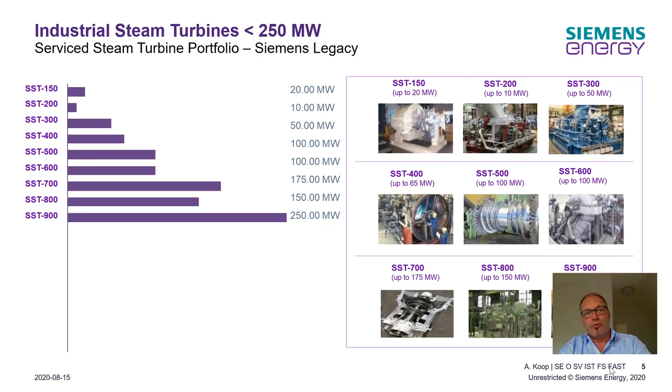Broken down to the industrial steam turbine service, you find here our portfolio, different types from 10 megawatts up to roughly 250 megawatts. The equivalent of it you will also find in our generator portfolio, and here also listed the large generators for the utility power plants.

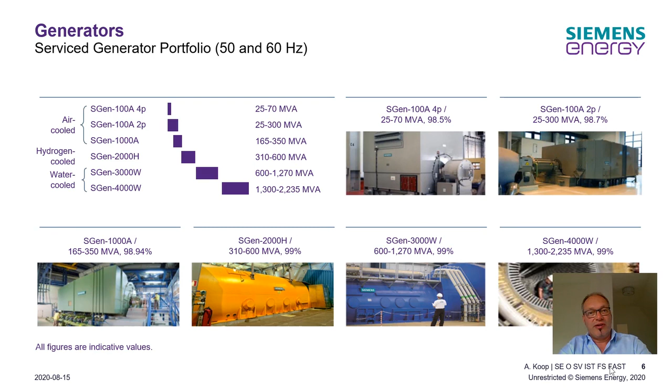Our service portfolio is about digital services, performance enhancements, long-term partnerships, maintenance solutions, and last but not least, training and consulting. That's it with a very brief overview of Siemens Energy.

Now I would like to start this section here, the reliability improvement, with a short video to give you the first impression about our remote diagnostic service which we offer and which we are talking about later on.

We at Siemens understand that reliable operations are key to a profitable and sustainable business. Remote diagnostic services allow us to support our customers 24 hours a day in a 7-day week, increasing their availability and reliability. The remote diagnostic service is an integral part of the Siemens high-value long-term programs. In 79 countries, we monitor the complete range of oil and gas and industrial rotating equipment.

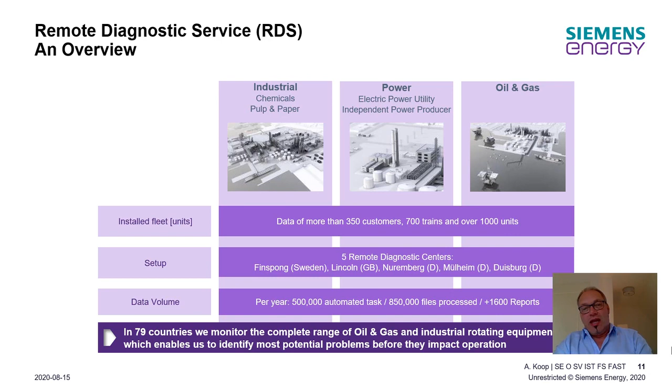You can see just an overview about our remote diagnostic centers, the tasks they do, where they are located worldwide, and which sort of industries we serve.

The RDS tackles mainly the questions of reliability and availability, and tries to increase and improve both of them with different tools, different processes. Both together enable us to improve your operation and your whole plant management in the before mentioned reliability and availability aspects.

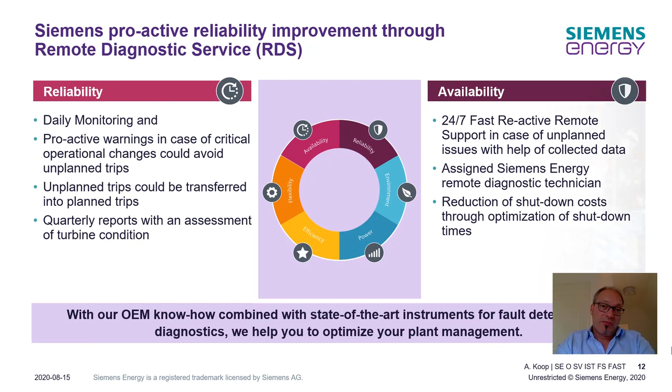This is especially the higher availability through fast problem analysis, the higher reliability through the predictive analytics, the turbine-specific outage planning, because we know very well about the behavior of that turbine and the areas to address during an overhaul, and of course some operational recommendations in case we found some deviations.

I will give you an example. We have at the left side of the slide the customer's control room with a process value well above the alarm and warning level. And at the right side you will see our remote diagnostic center with our virtual colleague John.

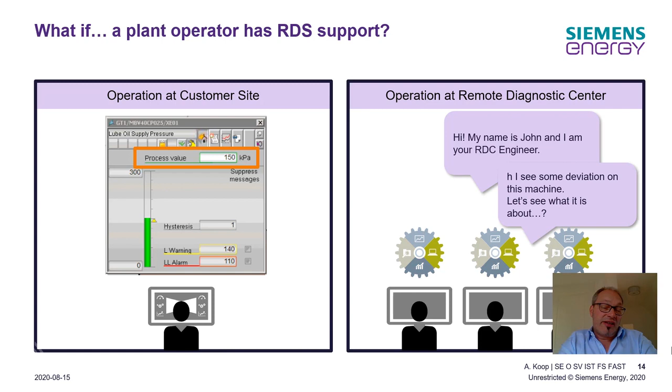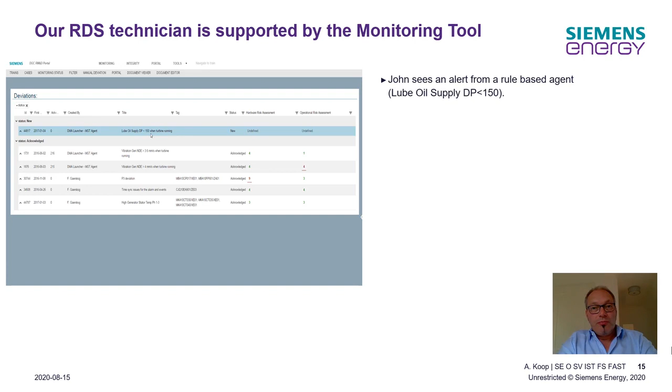He realized some deviations with the predictive analytics well before the operational side, the customer side, is able to realize that. The deviation is listed in a monitoring tool, and that gives an alarm to John.

And this alarm is of course not the customer's alarm. It's an alarm brought with a stricter level of these operational deviations, which is triggered here. Of course, first he has to check if it is a true deviation. In this case, we expect it as a true deviation, and John has identified it in this way.

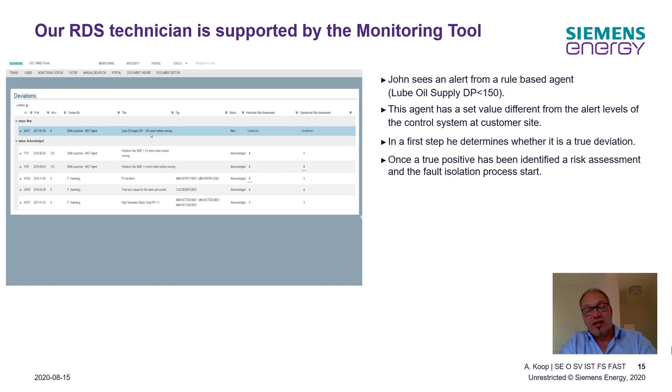He will start a risk assessment and the fault isolation process. Risk assessment is about the impact and probability, on the operational side as well as environmental issues. All of this is taken into account. When he did it, and if that's a severe risk, he will directly start the isolation process of the fault and try to get to a proper diagnosis.

And with help of the system, with cases from the past, that shows the probability of the diagnosis made by John. In case of any doubts, and in case he needs additional support, John always contacts the back office specialists and the help desk team. And when the fault isolation process is done, the recommendations can be given via notification to the customer directly afterwards and in a very short time interval.

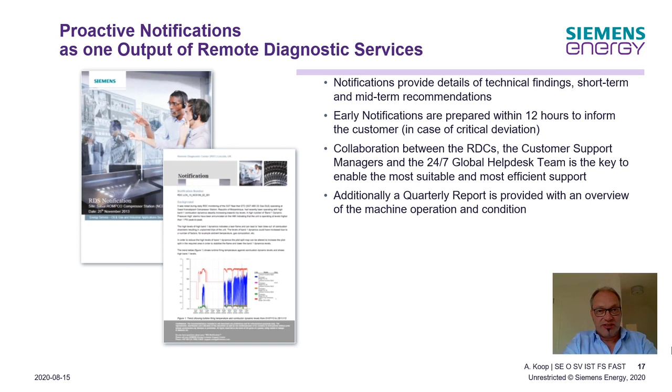I would like to give you 2 examples about this fault isolation process and the deviations recognized by the predictive analytics. The first one is an industrial power plant with heavy fouling, heavy deposits in the blade area. The so-called inlet section of steam path index showed that deviation because it increased. This behavior was recognized and led to the conclusion of the fouling.

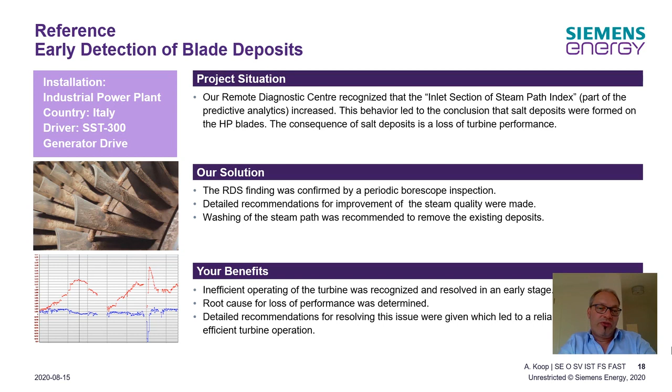In this case, a cross-check was done with a periodic borescope inspection, which also revealed the inlet section of steam path index was totally right. The blades were full of heavy deposits. A recommendation was provided for a washing process and to improve the steam quality to avoid that in future. The benefits for the customer are quite clear. The inefficient operating condition was detected at an early stage, and the root cause with the subsequent recommendations were given.

The second example was the early detection of a condenser fouling at a pulp and paper industry. In this case, a different index, the so-called stage pressure index, LP, showed that deviation. The conclusion was that there's a problem in the condenser, fouling in the condenser, especially in the condenser tubes. The customer was consulted and they confirmed that they have problems with cleaning balls.

Together with the customer, we redesigned the condenser to avoid the dead spots where the cleaning balls get accumulated. And after the cleaning balls went into operation, a successful operation again, the stage pressure index showed the low values like before. Again, an inefficient operating condition could be detected at an early stage, and together with the customer, we were able to solve the problems and to give proper recommendations.

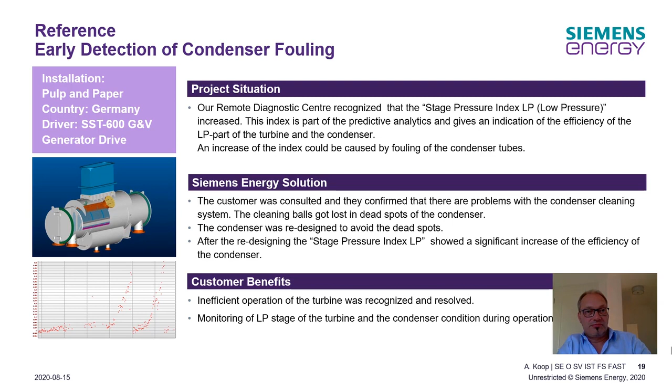So, coming to part 3 of my presentation, reactive troubleshooting 24/7. In this case, what if an unplanned issue or shutdown really happens? It is most important to be able to react very, very fast, especially in times like nowadays with travel restrictions. It shows that it is quite often very time consuming to send someone to the customer site to deal with a really major issue.

For this we set up a remote support process. We call it internally virtual guidance. That's quite a straightforward remote support. Everything that is needed at the customer side is basically a smartphone, a good network connection, and finally a QR code from our side, which is sent, for example, by email. And with help of the QR code, a direct connection is established between the back office in Germany, in this case, and the customer site worldwide, with instant direct support.